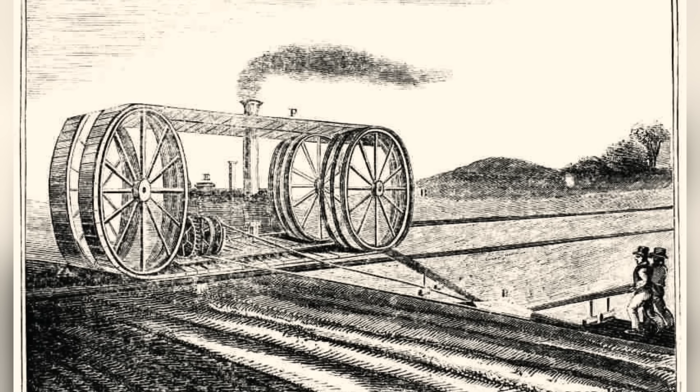He could have stayed. Most men did. But Aveling had a frustration that wouldn't leave him alone, and it was a frustration born of watching something absurd happen over and over again.

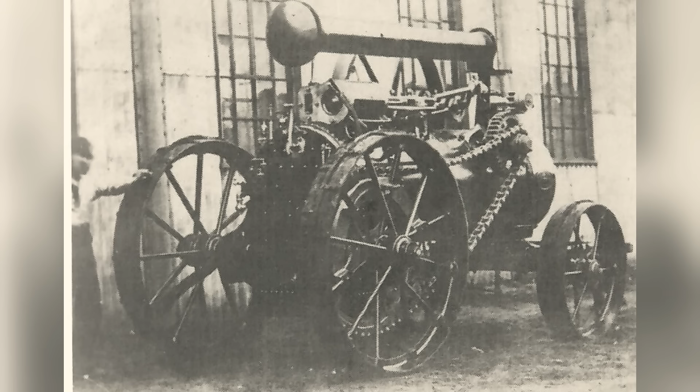Portable steam threshing engines, heavy, powerful, perfectly capable of moving themselves, were being hauled from farm to farm by teams of horses. The engine sat on wheels. It had a boiler. It could generate the power to turn those wheels itself. And yet there it sat, dead weight on a flatbed, dragged across rutted Kentish lanes by animals that could have been doing something useful. Aveling watched this.

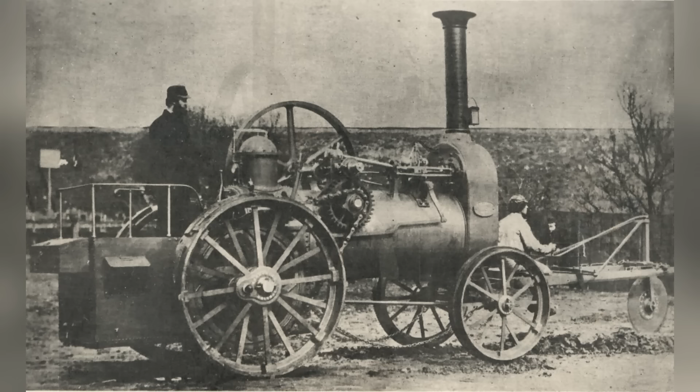He considered it idiotic. And in 1856, working alongside his father-in-law in a small millwrighting yard at Edwards Yard, Rochester, he did something about it. He built his first steam plough.

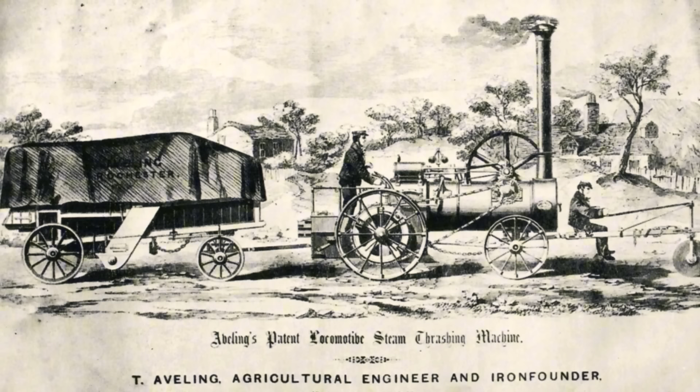3 years later, in 1859, he modified a Clayton and Shuttleworth portable engine into the first self-propelled traction engine. The modification was straightforward in principle, a chain drive connecting the engine's crankshaft to the rear axle, but its implications were enormous. For the first time, a steam engine moved itself down a public road under its own power.

The Kentish farming community recognised what they'd witnessed. A subscription was raised. 300 guineas, a substantial sum, was presented to Aveling in recognition. He'd earned a title that would follow him into every engineering textbook written in the next century and a half, the father of the traction engine.

And fathers, of course, have children. What Aveling fathered next would pave the modern world.

Chapter 2: The Rampant Horse of Kent. What Aveling needed was capital. What he found was Richard Thomas Porter, a businessman, a natural marketeer, and the perfect counterweight to an engineer who thought in iron and torque.

In 1862, the two men formed Aveling and Porter. They moved to a foundry at Strood, across the River Medway from Rochester, and they named it the Invicta Works, after the motto of Kent, Invicta, unconquered.

The rampant horse of Kent, the rearing white horse that also adorns, through separate heraldic lineages, the arms of Stuttgart, Porsche and Ferrari, was adopted as the firm's emblem around 1865 and registered as a trademark in 1891.

It would travel north to Grantham in 1934, preside over the gates of the greatest road roller works in the world, and remain there until 2010. But that was 70 years away. In 1865, the horse had work to do, closer to home.

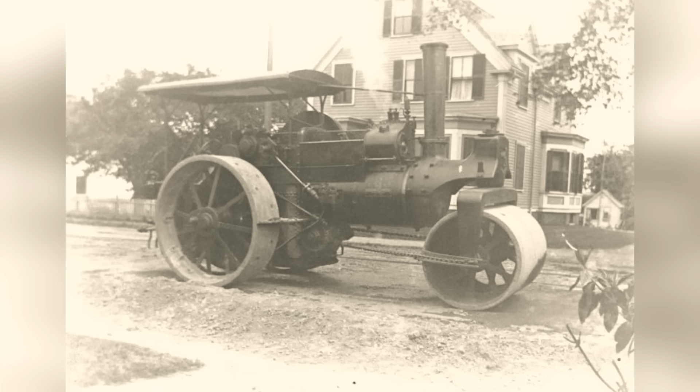The first practical steam road roller was tested that year at 3 places only: Military Road, Chatham, Star Hill, Rochester, and Hyde Park, London. A 12-ton machine with a smooth iron drum at the front and driving wheels at the rear, steered by a man standing on a platform behind the boiler, pressing heated metal into compacted stone. It worked. The road surface it produced was harder, flatter, and more durable than anything horse-drawn rollers could achieve.

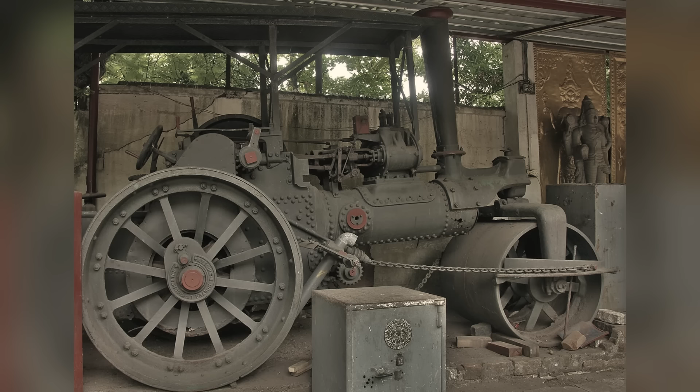The first production roller left the Invicta Works in 1867, bound for Aveling's agent in Paris. The very next year, an Aveling and Porter 15-ton steamroller was shipped across the Atlantic to pave the carriage roads of Central Park, New York. A Kentish foundry was building the roads of Manhattan before the decade was out.

The War Office noticed. Aveling and Porter began supplying steam sappers, military road rollers and traction engines to the Royal Engineers. Thomas Lake Aveling, Thomas's son, born in 1856, took over the firm's management in 1881.

By the early 1900s, employment at the Rochester Invicta Works had risen from 400 in 1872 to a peak of 1,500. Aveling and Porter were supplying roughly 70% of every road roller sold in Britain, 7 rollers in every 10. The unconquered horse was earning its name.

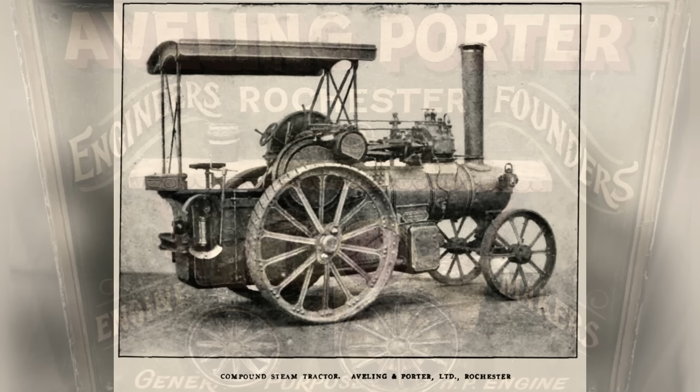Thomas Aveling himself didn't live to see it. He died on the 7th of March, 1882, aged 57. The Cambridge boy raised on birch rods and fenland endurance, who'd looked at a steam engine being dragged by horses and decided the world could do better. The firm he left behind would outlive him by 128 years.

It would not, in the end, outlive the decisions made about it by men who never stood on its foundry floor. Chapter 3: The Combine That Killed Itself.

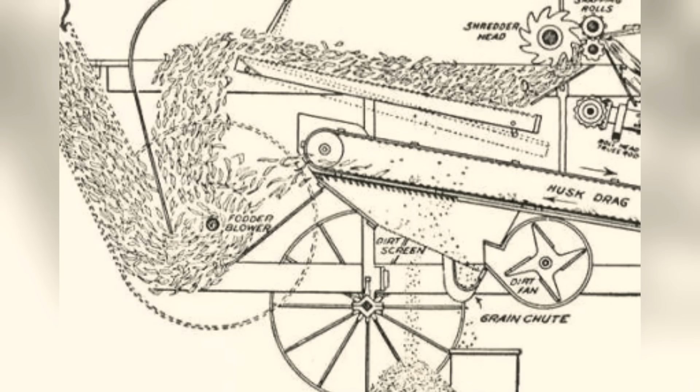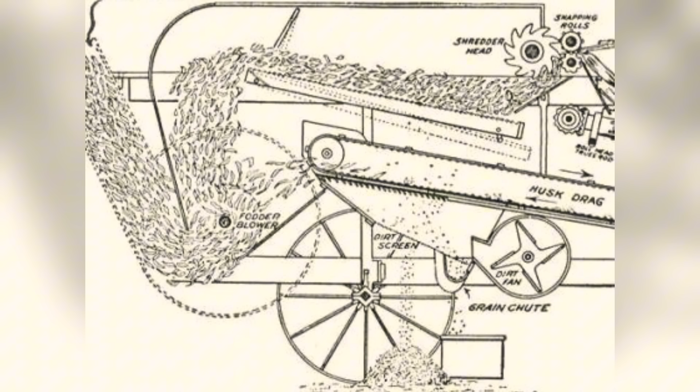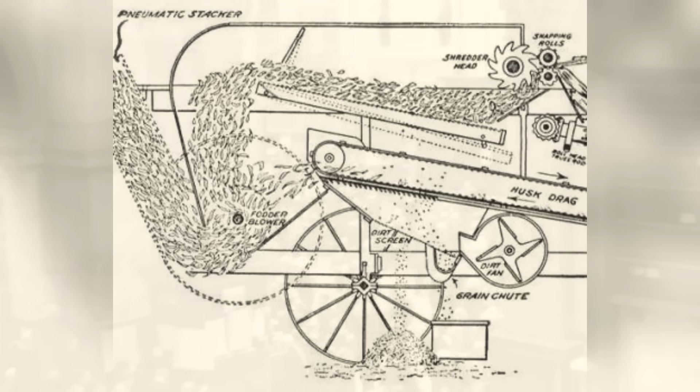There is a recurring pattern in British industrial history, and it goes like this. A group of successful, independent engineering firms are persuaded to merge into a single combine on the promise of shared overheads and rationalized production. The combine produces nothing but central overhead costs that outweigh the savings. The combine collapses, and from the wreckage, one man, usually younger, usually angrier, usually in personal debt, pulls together enough of the pieces to start again.

The combine in this case was Agricultural and General Engineers, AGE, formed in 1919 at the joint instigation of Thomas Lake Aveling and a businessman named Archibald Maconochie. The idea was to rationalize British farm engineering under one corporate roof: 14 subsidiaries, 10,000 employees, a London Stock Exchange listing. Within 13 years, all of it was gone.

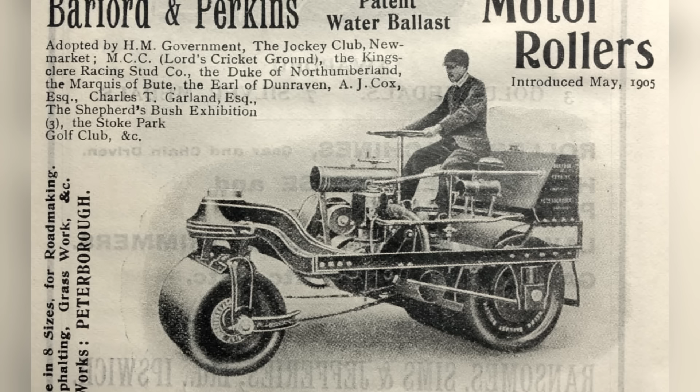AGE collapsed into receivership in February 1932. The liquidator broke it up and sold the pieces. One of those pieces was Aveling and Porter.

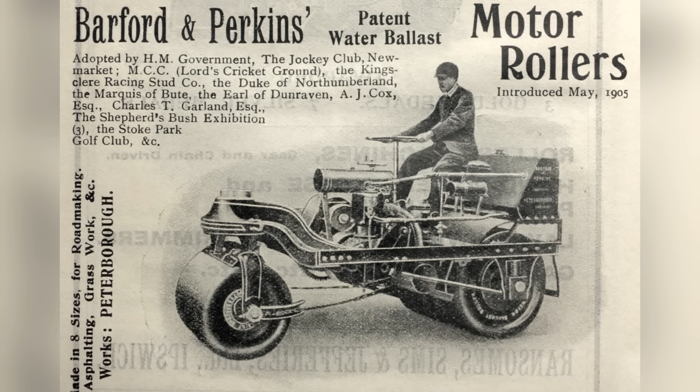Another was Barford and Perkins, a complementary firm founded in 1871 by William Barford and Thomas Perkins, who'd acquired the Queen Street Iron Works in Peterborough for £2,000. Their product line was smaller, lighter rollers, petrol-engined machines designed for road maintenance work where steam was overkill.

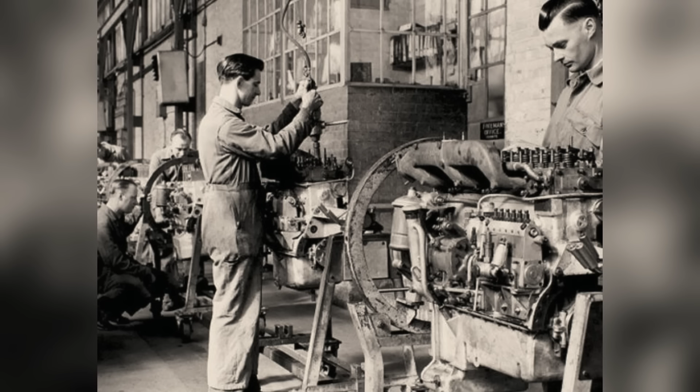There's a detail buried in the Barford and Perkins lineage that matters enormously, though nobody could have known it at the time. Frank Perkins, whose father owned the firm, worked first for the family business and then moved to Aveling and Porter's Rochester Works, where in 1929 he met Charles Chapman, the engineer who would go on to co-invent the world's first practical automobile diesel engine.

The two men whose work powered post-war British motoring met on the shop floor of what would become Aveling-Barford. History was being assembled in the machine shops before anyone had drawn up the plans.

The man who rescued the wreckage was Edward James Barford. Born on the 23rd of April 1898, Barford was a Rugby schoolboy who enlisted as a private in 1915, aged 17. By 20 he was acting major. He was twice wounded, severely gassed, twice mentioned in dispatches and awarded the Military Cross.

By 1932 he was personal assistant to AGE's chairman and, by his own account, increasingly dissatisfied with the poor management that was dragging the combine to its grave. When AGE collapsed, Barford raised the funds to save both Barford and Perkins and Aveling and Porter from the receiver. He was, at the time, several £1,000s in personal debt.

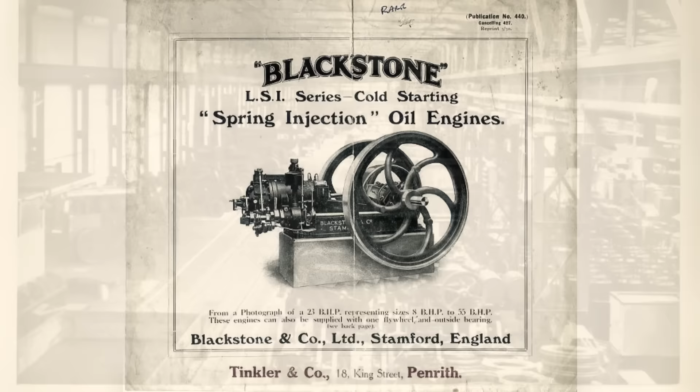The backing came from Ruston and Hornsby of Lincoln, R.A. Lister & Co., and Ransomes, Sims and Jefferies, established engineering houses who saw what Barford saw, that the products were sound, the brand was trusted, and the management had been the only thing wrong. The rescue created a new company, Aveling-Barford Limited. Edward James Barford was its chairman. He would hold that position for 35 years, and the first decision he made would define everything that followed.

Chapter 4: The 10,000 tons. Ruston and Hornsby of Lincoln had a surplus 36-acre site at the top of Houghton Road in Grantham, a former boiler works and First World War shadow factory where they'd built submarine engines.

George Ruston Sharpley, Ruston and Hornsby's managing director, offered Barford a long lease, running 75 years to 2009. The condition was contractual and non-negotiable: every machine Aveling-Barford built would use Ruston and Hornsby diesel engines. Grantham Borough Council sealed the deal by pledging to build council housing for essential workers, the Walton Gardens estate on the south side of town.

The move from Rochester to Grantham took place in early 1934, and Edward Barford's promotional booklet recorded the scale of it with undisguised pride. It constituted, Barford wrote, one of the largest factory removals ever undertaken by the LNER and Southern Railway, entailing the transportation of the whole of the works plant, stores and effects, amounting to nearly 10,000 tons. 10,000 tons of engineering heritage, loaded onto railway wagons in Kent and unloaded in Lincolnshire.

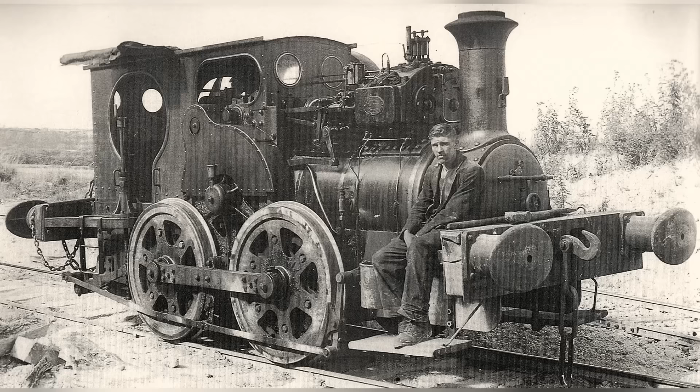Nobody thought to. The board of the new company reflected the alliance that had made it possible: Edward James Barford as chairman, his cousin William Geoffrey Barford as director. From Ruston and Hornsby, George Ruston Sharpley and John Heinrich Wolf Paulin, the latter also a director of Ransomes in Ipswich. It was a tight group, men who knew engineering, knew each other, and knew what a 36-acre Lincolnshire site could become if the product was right and the management was disciplined.

On the 29th of June 1937, Aveling-Barford was listed on the London Stock Exchange. Capital raised: £320,000. The firm that very year claimed to build 75% of all road rollers sold in Britain, 3 rollers in every 4. The rampant horse of Kent, the same emblem that had presided over the Strood foundry, was now mounted in brass above the Grantham gates, and Grantham, a quiet Lincolnshire market town on the Great North Road, was being transformed into something it had never been before, a company town.

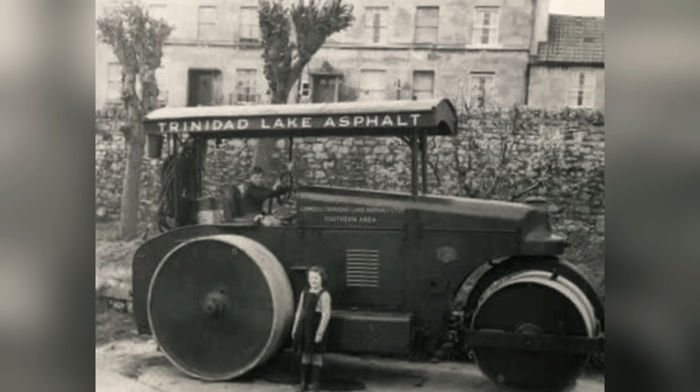The product range expanded fast. The 12-ton Aveling dumper, introduced in 1938, was Britain's first mass-produced site dumper. There were dairy cooling systems, cooking ranges for hospitals, hotels and works canteens, and the licensed Leyland concrete road jointing system, developed on the German autobahns of the late 1930s. Edward Barford wasn't building a road roller manufacturer. He was building a heavy engineering empire, and the Invicta Works on Houghton Road was its capital.

Chapter 5. The foundry at war. When war came in September 1939, the Invicta Works converted with the speed that only a heavy engineering plant can manage. The machine shops that had been cutting axle splines for road rollers were now machining components for Bren gun carriers and Lloyd carriers, the light armoured vehicles that would carry British infantry across North Africa and Normandy.

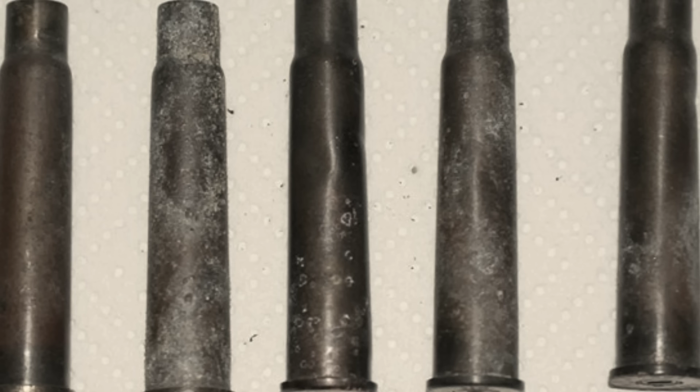The foundry cast shell fuse caps. The fitting shops produced what the army called calf dozers, small bulldozers built for combat engineering, compact enough to be loaded onto landing craft. Precision components for tanks and submarines moved through the same bays where dump truck chassis had stood 6 months earlier. Of the workforce who left Houghton Road for the armed services, 17 men did not return.

Their names are inscribed by surname only on a wavy-headed plaque set in a freestanding wall at the works gate, beneath the Invicta horse: 'In grateful remembrance and deep appreciation of the personnel of Aveling-Barford Ltd, who lost their lives in the 1939-1945 war.' The Imperial War Museum holds it as Memorial Number 3706. The surnames are not published online.

They remain at the gate, or what was once the gate, where their colleagues would have passed them every morning for 65 years. Among the wartime leadership at the Invicta Works was Fitzherbert Wright, works director and grandfather of Sarah Ferguson, the future Duchess of York. It's the sort of detail that sounds like a footnote, but it captures something about the social world of mid-century British engineering. The men who ran these works moved through the same networks as the men who ran the country.

Aveling-Barford wasn't a backwater. It was a nationally significant enterprise whose directors were known in Whitehall, in the city, and in the shires. Peace brought a boom. A new factory opened at Newcastle upon Tyne on the 17th of September 1946. 2 new subsidiaries, Barford Developments Ltd and Barford Agricultural Ltd, were formed in April 1946.

And in 1947, 6 miles from Grantham at Belton, Barfords of Belton developed something entirely unexpected, the Barford Atom. At 80 kilograms, it was the world's smallest tractor, a machine so tiny it could be lifted by 2 men, designed for market gardens and small holdings where a full-size tractor would have been absurd. It was a footnote to the main product line, but it was a footnote that revealed something important about the culture at Aveling-Barford. These were engineers who liked solving problems, all problems, even the small ones.

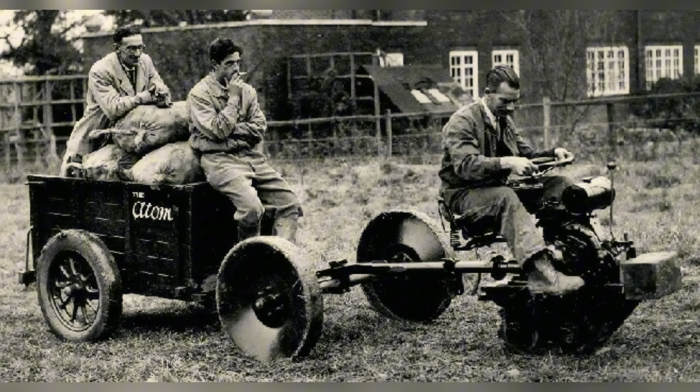The deal that would shape the next quarter-century came in 1949. Aveling-Barford agreed with Austin Western Inc. of Aurora, Illinois, to build their motor graders under license, heavy machines for road construction, sold as Aveling Austin and later under the Invicta Shield logo. Critically, the license specified that only British-built engines would be fitted: Leyland, Rolls-Royce, Perkins, AEC.

In New Zealand, where Dominion Motors sold hundreds, drivers nicknamed them ambling bastards, a term of abuse that was also, in the way of construction workers everywhere, a term of grudging affection. The Ministry of Works fielded Aveling Austin graders in every operating district in the country. They weren't fast, they weren't glamorous, they were dependable, and in the post-war world, dependable was the only currency that mattered.

By the early 1950s, 70% of Aveling-Barford's output was exported. The group had subsidiaries in Paris, Johannesburg, Cape Town, Durban, Port Elizabeth, Salisbury in Rhodesia, Caracas, Toronto and Sydney. The rampant horse of Kent was stamped on machines working in African quarries, Australian mines, Venezuelan oil fields and New Zealand hill country roads. A single Lincolnshire town was supplying the post-war world with the equipment to rebuild itself.

Chapter 6. The Master Pavior.

The Invicta Works at its peak was a 36-acre rectangle on the south side of Grantham, wedged between Houghton Road and the East Coast Main Line. The internal railway, a standard gauge system of sidings and traverses, crossed beneath the Great North Road through a separate arch next to the mainline bridge.

Iron-roofed machine shops, the plate shop, the paint shop, the foundry, the drawing office, the weighbridge, a sports field at Arnold Field in Gonerby Hill Foot, an enormous social club hall at Houghton Road, used in 1939 as cinema and stage, and destroyed by fire later that year, because works social clubs in Lincolnshire were apparently not immune to the hazards of the age. A young man arriving for his first shift in the 1950s would have smelled the foundry before he reached the gates.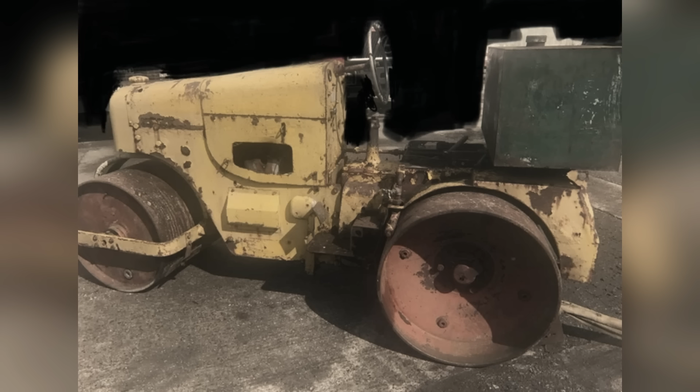Houghton Road at 4:30 in the afternoon was a sight that anyone who lived in Grantham in those years still remembers. One worker's recollection, preserved on the Grantham Matters community page, captures the scene. Houghton Road used to be choked with cars and men in blue overalls on bikes at 4:30. Real people with real jobs, all gone. It wasn't just a shift change, it was the pulse of a town.

Grantham rose and fell with the works hooter. The machines that earned all of this were the GA, GB and GC diesel rollers, and above all, the legendary Master Pavior series. The GNT, GNS and GNR Master Paviors, introduced in the 1950s, were the definitive post-war British road roller. Operating weights from 7.5 to 15 tons, multi-cylinder diesel engines, enclosed cabs, precision gearboxes that gave the operator surgical control over compaction pressure.

They were heavy, slow, indestructible, and unmistakable. Painted Aveling yellow, the rampant horse cast into the engine cowling, built to outlast the roads they paved. And they did outlast them. Working master paviors survive today, 70 years on, in preservation collections and council depots across the country.

In the early 1960s, 54 Aveling-Barford 30-ton SN series dumpers built the foundations of the Aswan High Dam. Stage 1, the coffer dam that held back the Nile while the main structure rose behind it. 54 machines from a single Lincolnshire works, operating in Egyptian heat, hauling fill material for one of the largest civil engineering projects in human history.

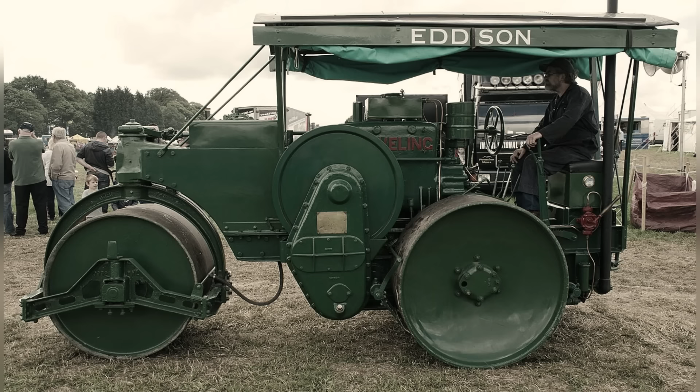It was the summit. The ledger was healthy. The master pavior was selling worldwide. Exports ran at three-quarters of everything the works produced. The Queen's Award to Industry would come in April 1967. The Queen's Award for Export followed in April 1972. Edward Barford, chairman, Lloyd's underwriter, Military Cross, was at the peak of his influence, showing the Prime Minister around a works that represented everything British heavy engineering was supposed to be: independent, profitable, exporting, employing a town.

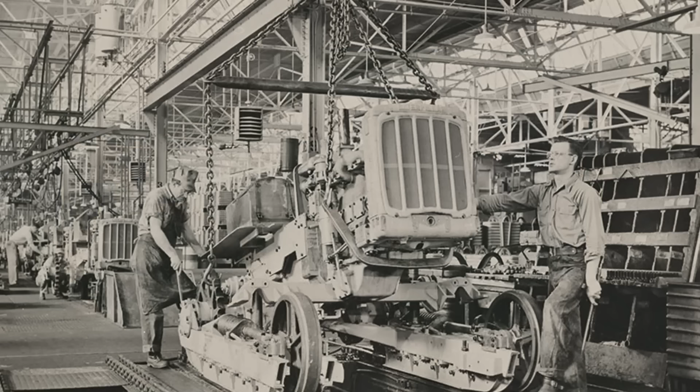But the warning signs were already there, visible only if you knew where to look. Caterpillar had opened its French operation at Grenoble in 1961, acquiring the French firm Richier and starting with around 300 employees. Its Belgian assembly plant at Gosselies followed in the early 60s. The Americans weren't just exporting machines anymore. They were building them inside Europe, inside the tariff wall, inside the market that Aveling-Barford had always treated as its own. And in Japan, something quieter and more dangerous was happening.

Komatsu, under President Ryoichi Kawai, who took over in 1964, had won the Deming Prize for quality control that same year and publicly declared the company's explicit goal to surpass Caterpillar. In 1967, Komatsu established its first overseas subsidiary, NV Komatsu Europe SA, in Belgium. The Japanese weren't coming for Aveling-Barford specifically, they were coming for the entire world construction equipment market. Aveling-Barford just happened to be standing in the path.

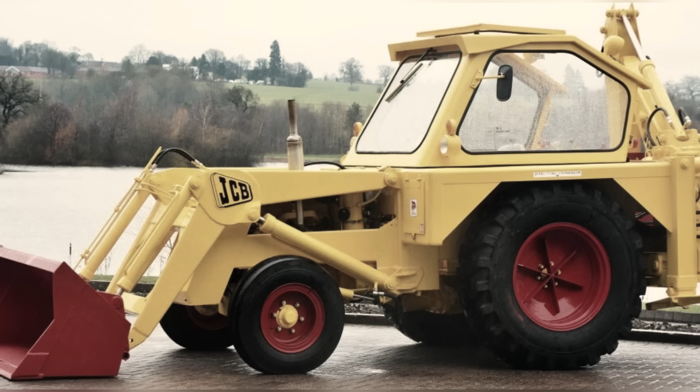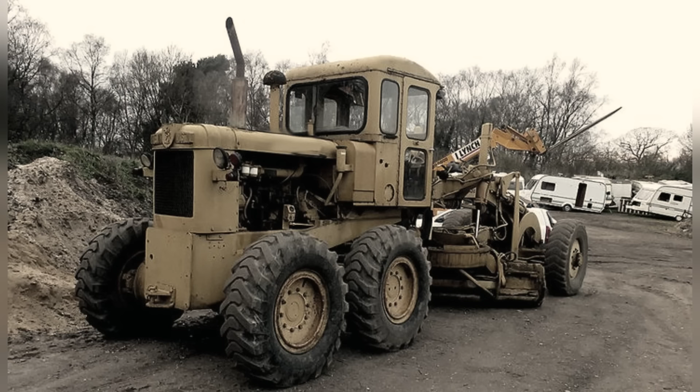Closer to home, JCB was rising. Joseph Cyril Bamford's backhoe loaders were transforming the British construction site, eating into the market for the dedicated single-function machines that Aveling-Barford built. And behind the brass gates on Houghton Road, the product line was showing its age. The motor graders still relied on a single 1949 American license from Austin Western. The Ruston and Hornsby diesel engines, contractually mandated by a lease signed in 1934, were beginning to look dated against newer, lighter power units.

At the moment the Prime Minister toured the Invicta Works and pronounced himself impressed, the forces that would destroy it were already in motion. Caterpillar was inside Europe. Komatsu was setting the explicit goal of world domination. JCB was rewriting the rules of British construction equipment. And in the wings, not yet visible, but already calculating, Donald Stokes was preparing to take the chair at the Leyland Motor Corporation.

The pheasants fell at Scopwick that Friday afternoon. Edward Barford hosted his guest. The works hooter sounded at 4:30, and 2,000 men in blue overalls poured out of the Houghton Road gates on their bicycles and into the November dusk. It was the last uncomplicated day the Invicta Works would ever know.

Chapter 8: Lord Stokes Comes Calling. Donald Stokes was appointed chairman and managing director of the Leyland Motor Corporation on the 27th of April 1967, following the retirement of Sir William Black. He was already, that spring, in covert merger talks with British Motor Holdings, talks encouraged by Tony Benn at the Ministry of Technology and backed by the Wilson government's Industrial Reorganisation Corporation, which believed that British industry's salvation lay in scale. Bigger companies, bigger balance sheets, bigger overheads. It was the AGE philosophy of 1919 dressed in 1960s Whitehall language, and it would produce the same result, only this time the collapse would take four decades instead of thirteen years.

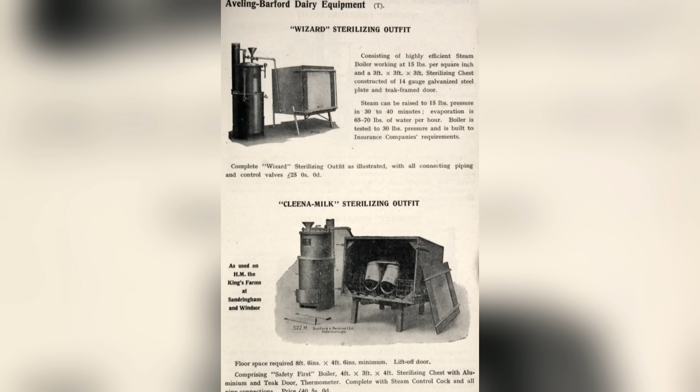In November 1967, Leyland offered £9,250,000. The Aveling-Barford board accepted. JCB also bid—Anthony Bamford, son of the founder, later Sir Anthony, later Lord Bamford, wanted the Grantham works. He was turned away. The board preferred Leyland's money, Leyland's name, and Leyland's promise of investment and expanded export reach.

Through Leyland's global commercial vehicle network, it was a reasonable decision. It was also a catastrophic one. But that's how catastrophe usually arrives in British boardrooms, wearing a good suit, carrying impressive projections, promising synergies.

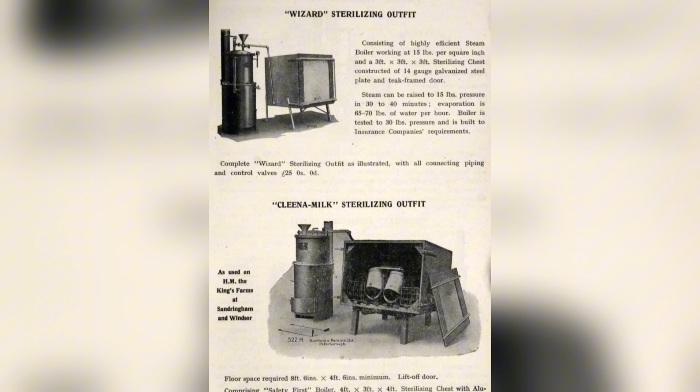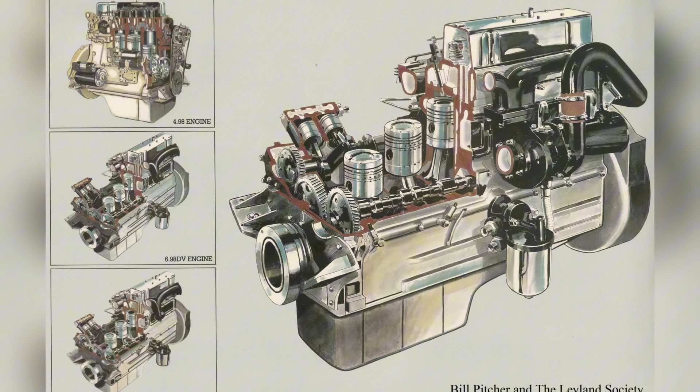The takeover completed on the 1st of January 1968. Just five months later, in May 1968, Leyland Motor Corporation merged with British Motor Holdings to form the British Leyland Motor Corporation—100 companies, 200,000 employees, a sprawling conglomerate that Donald Stokes himself privately described as unwieldy. Aveling-Barford was now a subdivision of a subdivision. The brass rampant horse still stood above the Grantham gates, but the decisions about what happened behind those gates were now being made in offices that had never heard the works hooter and never would.

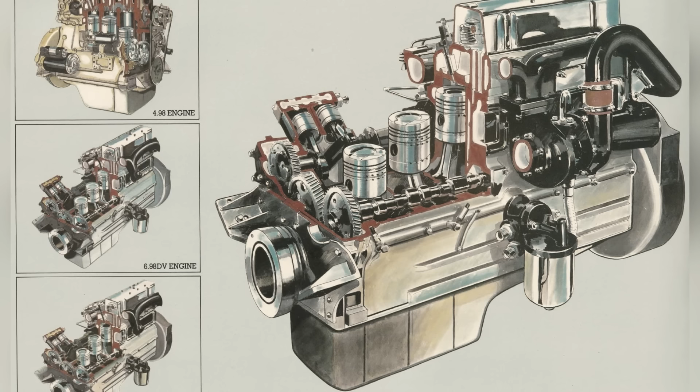Edward Barford, chairman since 1933, the man who'd rescued the firm from receivership in his personal debt, who'd moved 10,000 tons north by railway, who'd walked the Prime Minister through the machine shops, retired that same year, 1968. He was 70. He'd held the chairmanship for 35 years. Colin Ryan, managing director since 1956, became chairman in 1969.

But Ryan was now answering to Leyland, and Leyland had conditions. The first condition was engines. As part of the takeover agreement, Aveling-Barford was required to phase out the trusted Ruston and Hornsby diesels that had powered every machine since 1934, the contractual obligation of the original Houghton Road lease, and replace them with Leyland engines. It was presented as standardization. It was experienced, on the shop floor and in the field, as sabotage.

The Leyland diesels were unreliable. Within two years, Aveling-Barford machines fitted with the new engines were failing in Australian quarries, overheating, seizing, breaking down in conditions that the Ruston and Hornsby units had handled for decades without complaint. The men in Grantham who'd built those machines knew the engines were wrong. The operators in the field who ran them knew they were wrong. The only people who didn't know, or didn't care to know, were the men at Leyland head office who'd mandated the change.

In 1969, the Grantham Matters Community Archive preserves a photograph: the Aveling-Barford workforce out on strike at the top of Houghton Road. It was the first of many. The relationship between the Grantham Works and its new owners had curdled within 18 months, and then Leyland began dismantling the works from the inside.

In September 1975, Leyland bought Thomas Ward of Gainsborough for £3 million and moved Aveling-Barford's tractor shovel, front loader manufacturing out of Grantham to Gainsborough. The product line that had been built, tested and refined in Grantham for decades was lifted out of the town and set down 40 miles away.

Simultaneously, because Leyland had also acquired Marshall Fowler, the Grantham operation was rebranded Aveling-Marshall, a name that meant nothing to anyone, that carried none of the heritage, that existed solely because a conglomerate's organisational chart required it. The rampant horse was still on the gates, but the works behind them was being hollowed out, one product line at a time, by men who measured value in rationalisation diagrams, not in machines.

Edward James Barford died on the 11th of July 1979. He was 81. The works he'd built from the wreckage of AGE, the works he'd moved 10,000 tons to create, was by then deep inside a nationalised conglomerate that was bleeding money from every division. Whether Barford lived long enough to understand what Leyland had done to his life's work is a question the record doesn't answer. The record does answer what happened next.

Chapter 9: The dressed-up distribution. The crisis arrived with the force of a decade's worth of deferred decisions landing at once. In December 1979, British Leyland, itself nationalised and hemorrhaging public money, announced it was looking to sell Aveling-Barford. By the early 1980s, the company was loss-making. Of the 1,100 workers remaining at Grantham, 800 faced redundancy unless the company was drastically restructured.

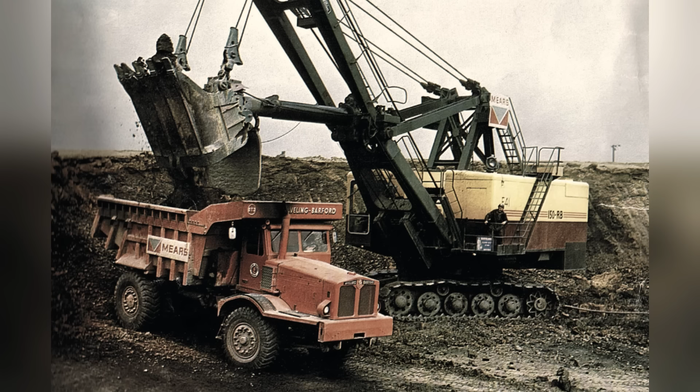140 years of continuous British heavy machine manufacturing, ending not with a ceremony or a speech, but with a small group of people, a camera, and a truck that would be delivered and then forgotten. What followed was an intellectual property fire sale conducted at a pace that suggested the owners knew what they had and wanted rid of it before anyone asked too many questions.

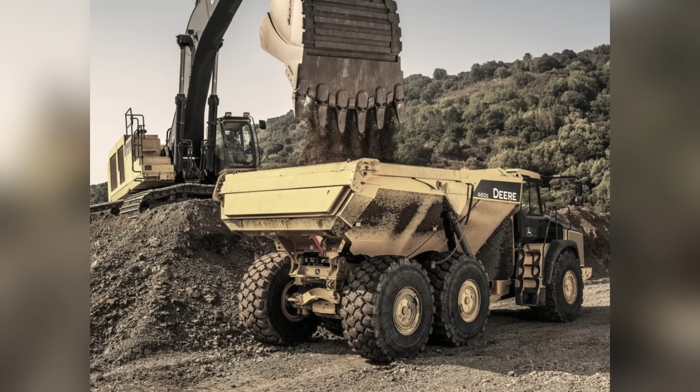In 2006, Singapore-based ST Kinetics bought the rights to the RXD series articulated dump trucks, the most advanced machines Aveling-Barford had ever designed. They were rebadged under the TRX Build brand: Grantham's engineering, Singapore's nameplate.

In August 2007, Norway's Moxy Engineering announced plans to buy the intellectual property rights to the Barford rigid dump truck range, the line that had built the Aswan Dam, supplied the Royal Engineers, and earned the Queen's Award for export. A prototype was exhibited at Bauma 2007, the world's largest construction equipment trade fair.

Then in 2008, South Korea's Doosan, formerly Daewoo, acquired Moxy and renamed it Doosan Moxy AS. The proposed Aveling-Barford-derived rigid range was cancelled. The prototype was scrapped. The engineering drawings, the tooling specifications, the accumulated knowledge of how to build a 30-ton rigid dump truck that could work an Egyptian quarry in 50-degree heat, all of it dispersed into corporate filing cabinets in Oslo and Seoul, where it would never be used.

And in 2009 the long lease expired. The 75-year lease that George Ruston Sharpley had granted Edward Barford in 1934, the lease that had brought 10,000 tons of engineering north from Rochester, that had built the Invicta Works, that had mandated Ruston and Hornsby engines in every machine, that had underpinned the entire existence of Aveling-Barford in Grantham, quietly reached its term. 75 years. The lease outlasted the product. The contract outlasted the company. The paperwork survived longer than the machines.

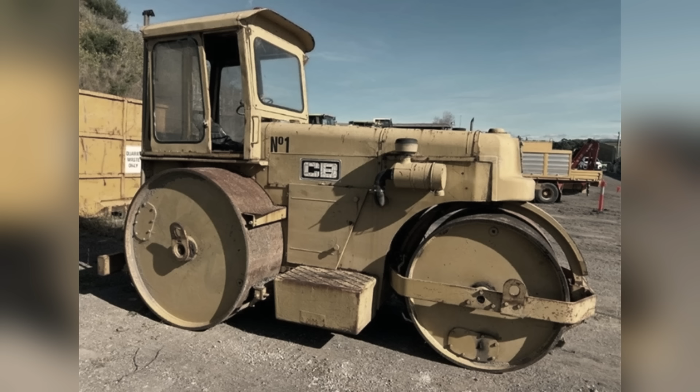Two months later, on the 11th of May 2010, the Bowden Investment Group, a private equity firm based in Altrincham, Cheshire, founded in 2007, acquired the Barford Site Dumper business and operated it as Barford Construction Equipment Ltd, later trading as Invicta's Engineering, from a portion of the Grantham factory. Stanhay Webb was bought back by ex-directors Niall Wordsworth and John Evans. Fruehauf was reconstituted as a separate trailer manufacturing concern.

But Plant and Engineering Services magazine was blunt about what the Bowden rescue actually meant. "In 2010, Barford went into administration," they wrote, "and that was effectively the end of the Barford dumper product, as there was no buyer interested for the administrator to sell to." No buyer for the dumper line that had built the Aswan Dam, for the rigid trucks that had supplied the Royal Engineers, for the machines that had carried the rampant horse of Kent across six continents. No buyer. The word 'interested' is the one that cuts deepest. Not that nobody could afford it, that nobody wanted it.

Chapter 11. Beneath the Tarmac.

The Houghton Road site today is not the sanitised retail park of folk memory. It is something quieter and stranger, an industrial half-life. MV Fruehauf Ltd assembles tipper trailers in part of the old plant, describing itself as occupying a 64-acre Grantham site. Invicta's Engineering machines precision components in the workshops where Parkinson plain mills once cut splines on dumper axles. Shell Plant Limited, which took over Aveling-Barford parts supply on the 12th of October 2015, holds the spare parts inventory, the last physical connection to the machines themselves. Three firms, working in fragments of a foundry that once paved the modern world.

The 1933 council houses of Walton Gardens, built to lure Aveling-Barford's essential workers north from Rochester, still stand on the south side of town. B&Q occupies the adjoining former Ruston and Hornsby site, not the Aveling-Barford foundry footprint. That's a common local conflation, and it matters to get it right, because the truth is sadder than the folk version. The foundry wasn't bulldozed for a DIY superstore.

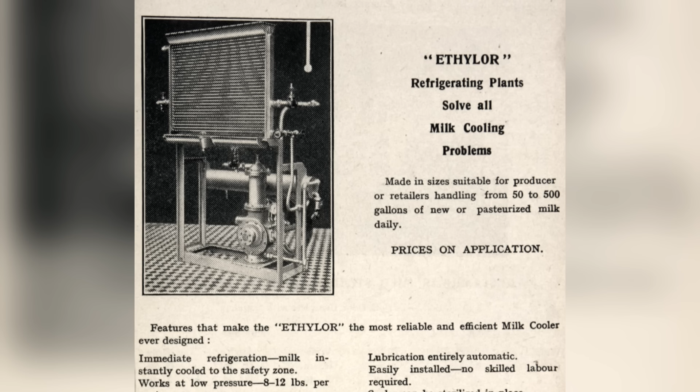On the 3rd of June 2016, 5 fire crews from Grantham, Sleaford, Newark and Billingborough fought a blaze on the former Aveling-Barford site. About 3,000 litres of paint thinner were destroyed. There were unconfirmed reports that the fire may have been arson. No injuries. No one was ever charged.

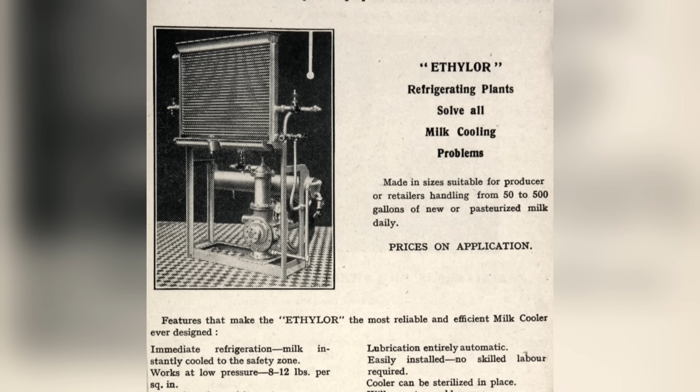A 3,000-litre paint thinner fire on the site of a works whose paint shop once produced Aveling yellow by the drumload. The irony wrote itself.

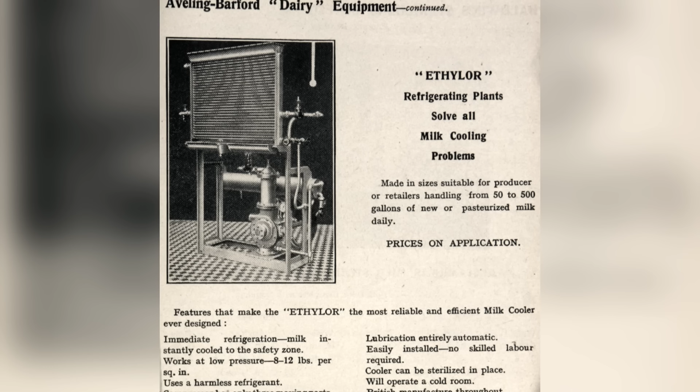The heritage survives in fragments. The Lincolnshire archives at Lincoln hold the surviving build records, product catalogues, photographs and engineering plans, many predating the 1934 merger. The Road Roller Association's Motor Roller Register lists about 150 surviving Aveling-Barford motor rollers. Approximately 600 Aveling and Porter steam machines survive worldwide, out of an estimated 12,200 built.

Beamish Museum is restoring an early Barford and Perkins D series. The Pallot Steam Museum in Jersey holds a fully restored 1912 Aveling and Porter steamroller.

Paul Dodd, a former Aveling-Barford engineer who became a lecturer at Grantham College in 2005, has digitised the company's promotional films, supplied to him by colleague Brian Hollingshead before the 2010 closure. The films survive because one man thought to ask and another thought to hand them over. That's how industrial memory works in this country. Not through institutions, through individuals who care enough to carry it.

In October 2012, Grantham's community radio station Gravity FM produced a tribute in words and music to Aveling-Barford. It aired once. There is no indication it was repeated.

The Matchbox No. 1 road roller still trades on eBay for a few pounds. George the Steamroller still appears on children's television. The big yellow road roller of British cultural memory, the one in Thomas the Tank Engine, the one in millions of pockets, the one painted on every primary school mural depicting post-war road building, is, more often than not, an Aveling. The first job of this documentary was to reconnect that childhood image to a real foundry, a real town, a real war memorial, real men.